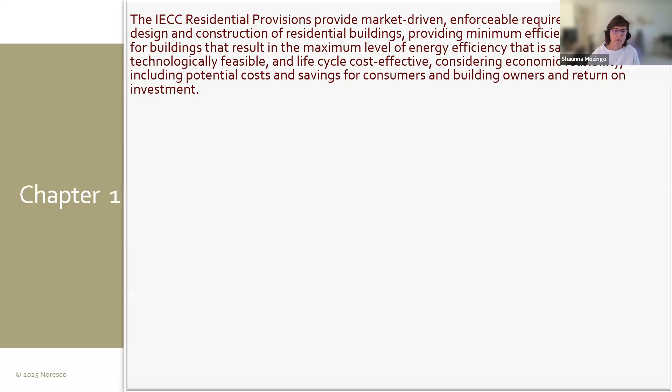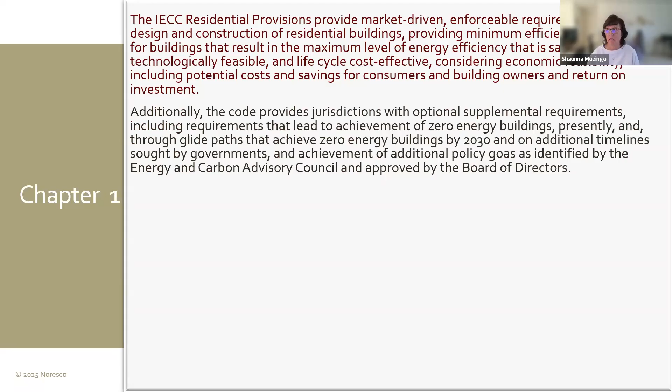Additionally, the code provides jurisdictions with optional appendix chapters, optional supplemental requirements to achieve zero energy buildings, all of those kinds of things. You still have the option of doing it, but it is an option. You can adopt the appendix chapters or utilize the supplemental resources that we'll talk about. Also, again, reiterating, there's some appendix chapters in there that are not mandatory unless the jurisdiction adopts them, but that can take it above minimum to deal with carbon emissions and those types of things that jurisdictions are looking for.

It's not limited. There has to be a prescriptive and a performance path, right? And I like this. I don't know if they lived up to it, but the code will aim to simplify code requirements to facilitate the code's use and compliance rate. I don't know if we managed simplifying it in some of those areas, especially commercial, but it's nice that it's in the intent. It's updated every 3 years with a subsequent edition providing increased savings. So that's letting everybody know that there is this intent that each additional cycle will build on it. It will never go backwards. So that's good to know.

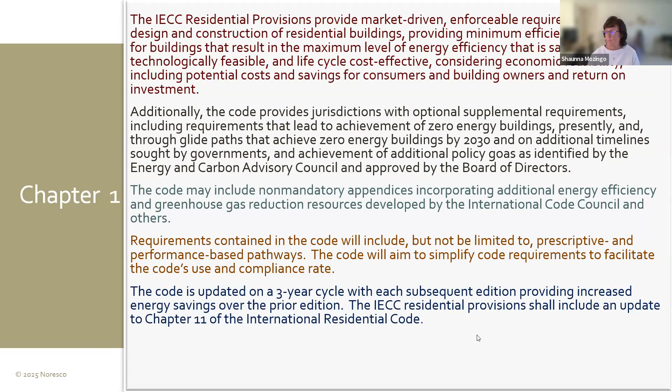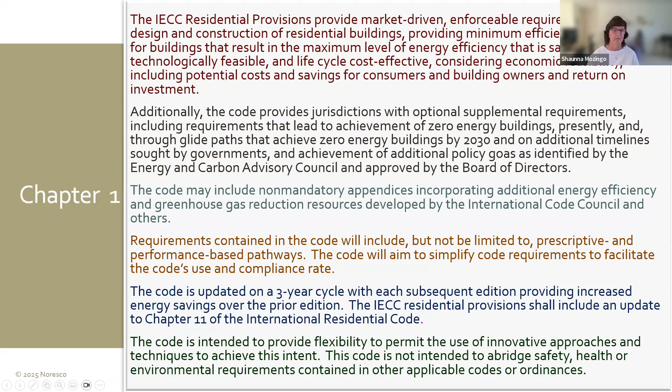And that the IRC Energy Code chapter comes straight from the IECC residential provisions. And then keeping the same sentence in there about provide flexibility, don't abridge safety, health, and environment. So we went from that one little tiny paragraph to all of this in hopes of covering everything that we could possibly throw at this code. So that's interesting. So a couple of things.

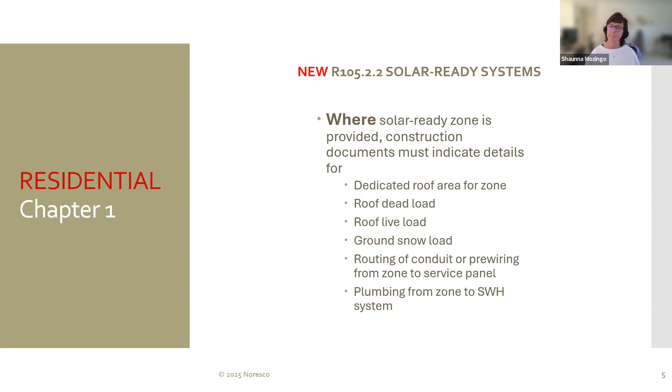There are some places in the code that do mention like solar or maybe demand response controls or things like that. But it just lets you know that where you install them, or where you do this, it has to meet the requirements. It does not require that you do it unless your jurisdiction requires it. So I just want to clarify that, when it says there's solar ready systems in 105, it doesn't mean you have to do solar ready systems. Where you provide solar ready systems, here's the requirements for that. This is for what you have to put on the construction documents to show those solar ready systems. So just want to reiterate that. I get a lot of questions like, it's in the code that you have to do solar ready. Only if your jurisdiction requires it.

All right, some new stuff that went into the code: definitions, of course. I always tell people when you get a new edition of the code, if you want to know where it's going, what's ahead of you in those multiple pages, it's getting bigger and bigger every time. It'll be as big as the IRC pretty soon. If you want to know where it's going, turn straight to chapter 2, right? You see all the new definitions, and some of the revised ones. But when you see new definitions, you can kind of see, okay, here's what's coming at me. Always go there.

Also, always reiterate to everybody that you cannot use this energy code or enforce this energy code or design to this energy code without looking in chapter 2 all the time. If you don't know the definition of conditioned space, for instance, there's no way you're going to enforce this code correctly, because it's not what you think. It's not just about heating or cooling a space, right? There's a lot more involved in it. It's whether or not your ducts are insulated, or whether or not your wall between two spaces is insulated.

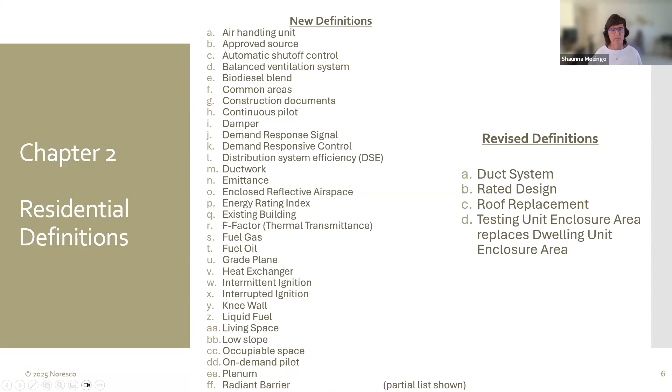There's a lot that goes into conditioned space, and whether you have to comply with the code. So make sure you're really looking at those definitions as you're going through this code. Some new things that got added. This is a new thing. It's been in commercial for a couple code cycles now, but it just got added to residential.

This idea that air actually has some good thermal properties to it, as long as it's not moving and it's not exchanging air with another space, right? So if I have a vented airspace, if I have air moving in and out of my cavities, that's not great. I can change temperature, I can change humidity, I can change all kinds of things wherever air moves. But if I can seal up this cavity really tight, and now my air is just moving within the cavity, that kind of movement is okay. I'm not moving in and out, so I have less chance of changing temperature and things.

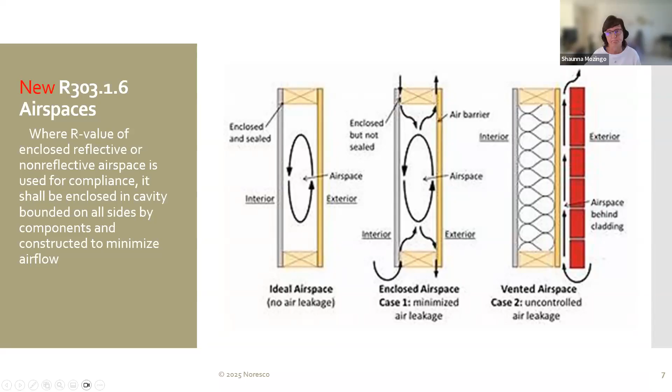If I build a really tight cavity and I don't have air moving in and out, I can use that airspace. I could use that air as part of my R value. There's a whole way of figuring out what that R value is and everything, but it's in there now. Like I say, it's been in the commercial for a couple cycles. I've never seen anybody propose it or use it, but it's in there, especially now that we're building tighter and tighter buildings and we're getting less air movement. Maybe it is good to use some of that air towards part of your R value. So just interesting things that make it into the code.

Another thing that made it into the 2024 are the radiant barriers. So radiant barrier folks have been at the code hearings as long as I've been going, wanting to get something in the code so that it was an even playing field for everybody that used them and everybody that makes them. It's never made it into the code, but now it has. There's no requirement for them whatsoever. It's just another one of those where if you use them,

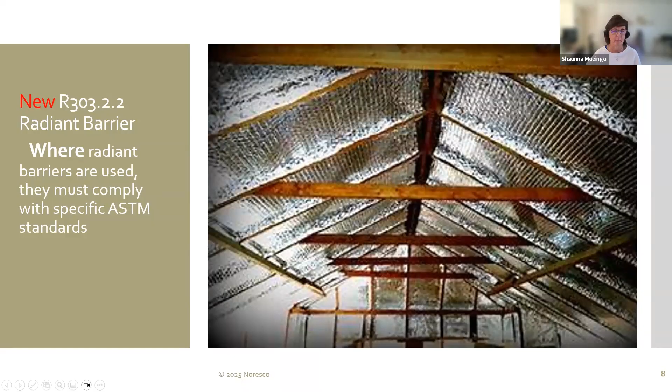they have to comply with a specific standard. So now all of the different radiant barrier manufacturers have to meet the same requirement. And so that's good. Then we get more consistency on at least the type of product that gets installed in the field. Not sure we'll ever get complete consistency on how things get installed in the field. But where you use a radiant barrier, they have to meet a certain ASTM standard. So that's good.

All right, let's talk about paths of compliance. They really haven't changed in a few code cycles. I think since the 2018, they haven't changed. Maybe the name has changed, but the concept hasn't, right? So we still have our prescriptive R value or U factor method. That's prescriptive by the book. You get what you get and you don't throw a fit, right? So you have a prescriptive table, you do what it says. Some people like that. They just want to be told what they have to do and they do it. And so if you go prescriptive, that's basically putting on plans everything that is shown in those tables and in the code sections, making sure that everything's on the plans.

We have another prescriptive-ish one, they call it prescriptive, but it does allow trades: the component performance alternative. Most of you are familiar with that. It used to be the total UA. That's REScheck, or if you use the rater software like Ekotrope or REM/Rate, it's the UA compliance. It's still called that in the software, but in the code, it's called component performance alternative. Not quite performance because it's only looking at the performance of the thermal envelope. It's not looking at mechanical and lighting and everything else. So it's not full building performance. It's just a component, the thermal envelope assembly performance.

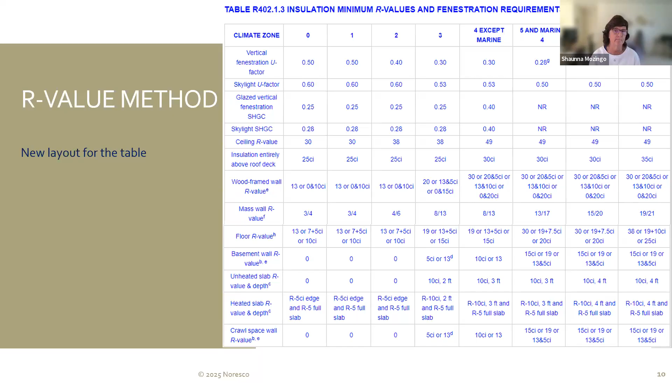But all of these changes got made. So it might be a little bit of a rollback in this table, but it's not a rollback in the code as a whole. There's still 7 to 8% energy savings that were gained overall for the building because of other changes. So just because it looks like we went back doesn't mean as a whole building that we did. So just some clarification.

U factor, same here. Don't forget this table has changed a little bit in how it's laid out. Not a lot of changes. I do want to make sure when you're looking at vertical fenestration, if you're in those climate zones that are getting to a higher altitude, climate zone 5, 6, 7, and 8, there are footnotes in there. This footnote D tells you that the code requirement is 0.28. But as soon as you get over 4,000 feet in elevation, then the footnote tells you it's 0.30 instead of 0.28.

So all of your software programs like ResCheck or your performance software are going to hold you to the 0.30 and compare you to the 0.30 as they're making trades because of this footnote. It's just because the argon gas that we sometimes use to get those lower U factors, you lose some of it once you get over elevation, and it doesn't hold it as well. So realize that they've changed that, and just be sure you're looking at those.

This U factor table, I've never seen anybody go total U factor for the house. Usually if they're going to do that, they're going to go with ResCheck, the component performance alternative with ResCheck. One thing that I do want to bring in is don't forget that now F factors got brought in. So you're going to see U factors for a lot of things in here, but then once we get to the slab, F factor.

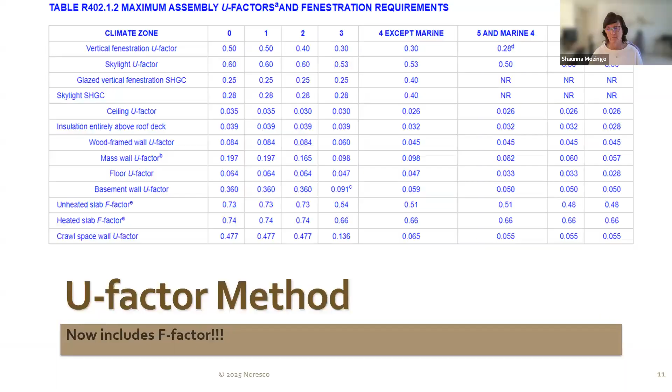All right, let's talk about component performance alternative. That's that ResCheck, or what used to be total UA. It's using that exact same U factor, F factor table in the code, it's just behind the scenes. And so it's that free software that you can go on the website and just put in your different components of the house. What are you using?

16 inches on center or 24 inches on center? Are you using 2x4s? Are you using 2x6? Are you using scissor trusses or raised heel trusses? You just tell it how you're building the house, and then throw in whatever insulation you're putting in, and it's behind the scenes calculating the U factor and letting you know if the whole building as a whole meets the total U factor for what you're trying to do.

So like I said, I've never seen anybody calculate it manually, but you could. So if you were using this path of compliance, you would either have to turn in a ResCheck, or turn in the calculations that show how you came up with the U factor for the whole assembly, right? Assembly U factor means the frame, the insulation, the drywall, the air film, every piece of an assembly gets looked at to get the U factor, and the total square footage of that. And so most people don't want to calculate that individually; they'll go into the software and do it.

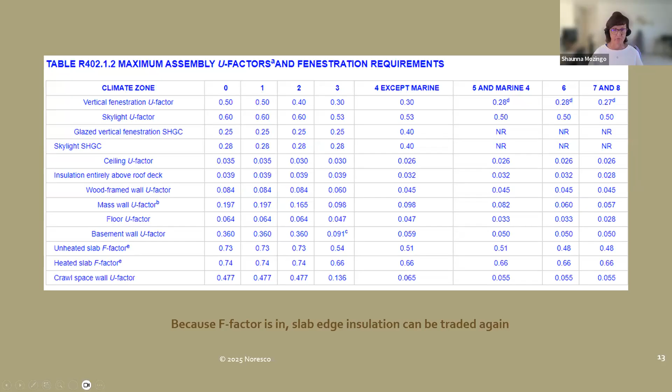Total building performance is R405. This is looking at more than the thermal envelope. This is looking at the thermal envelope and how it performs, but it also brings in what's your air movement, what's your air leakage, what's your duct leakage, how much lighting do you have, where are you putting your ducts, right? It's looking at all of the building as a whole, the total building and how it will perform, not just the envelope.

And so there's a little bit more trade built here. Because you can say, oh, I'm doing better than 4 ACH or 5 ACH or whatever it is for where you're at. And so now I can use that where I'm doing better to get out of something somewhere else, or to do less somewhere else. It's not very likely you'd totally get out of something, but you could use it to trade down. And so it just looks at a little more.

Something I want to point out in the 2024, if you're using it, and a lot of people don't know this, because remember I mentioned that electrification and EV and all of those things went into the code when it first got written. And then at the very end, the ICC Board of Directors pulled it out and put it in appendix chapters. So this is the only path in the whole code that has a penalty for using gas, when all of the gas versus electric went away and went into the appendix chapters. They just forgot it here.

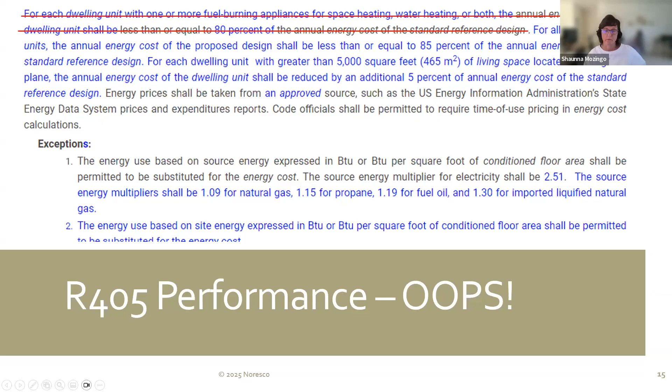It was something the board of directors took out and they forgot to take that one section. So it's going to have to be amended at the local level. So easy amendment, just put a strike through those lines, right? So that now it just says all dwelling units have to be 15% better. So just a heads up, there shouldn't be a penalty for gas in one path of compliance and not all the others.

If you're going R406, this is the energy rating index. This is the way, when I just look at the future, this is the way I see it. People want to get to net zero. How do you figure out what net zero is? It's just so easy with this scoring method, right? And so I see a lot more jurisdictions that are going above code or trying to set net zero policies are getting to requiring R406, which is this energy rating index.

And so you have a score of 100 is a 2006 house. We're trying to get down here to zero net energy. Not saying you're not going to use energy, but you're offsetting as much as you're using. And so it ends up being a net zero. So there's this scoring program. The backstops in it have changed over the code cycles from year to year.

One minute it's, oh, your envelope can't be worse than the 09 code. Oh, your envelope can't be worse than the 18 code. Oh, your envelope can't be worse than 10% of the current code. It changes every year. Why do they have a backstop in there? Because there's so much stuff you can trade in this path that you can't trade in others. I could put in a high efficient furnace and get out of some other requirements, where, well, a furnace doesn't last the life of a building.

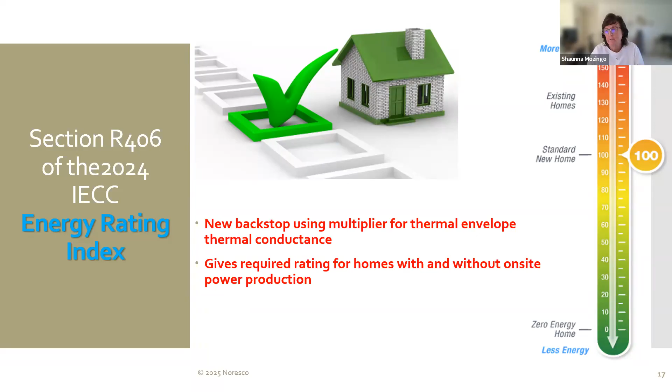And so you have to get a certain score if you don't have on-site power production, right? If I don't have some renewables on there, I don't have some on-site power production, then here's my score. If I'm using on-site power production, then here's my score. What this is trying to say is you can't just throw a bunch of solar on there and take it all the way to zero. You only get a certain amount of credit for the solar. You can put however much you want, I guess, but you don't get credit for all of it, because it still wants to make sure you're building a really good house in case the solar goes away.

So that's the new table. You know, if you were required to have a 54 without solar or a 43 with on-site power production, which doesn't have to be solar. When I've talked to some friends that are sitting on the 2027 residential energy code, they have said that there's very little change in the thermal envelope requirements, that more and more stuff will start focusing on the other aspects of the building, because they've gotten the envelope practically to where they can take it. So that was interesting to hear that they're not going after a bunch more on the thermal envelope. All right.

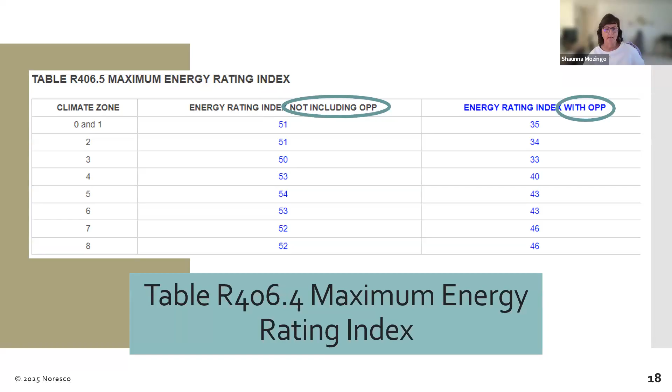If you were on the 2021, you saw this R408.2, this additional efficiency package. This came into commercial in 2012. Some people say the name is kind of misleading. Some people say, oh, you want me to get more energy efficiency out of the building, you want me to go above code. And that wasn't the idea. The idea was keeping with flexibility, to say, hey, we need X amount of increase in efficiency out of the buildings, but we can only crank it down so much before we take away the flexibility. So we're going to crank it down a little over here prescriptively, and then you tell us how you want to get the other 15% or 8% or 10%, whatever it is. And maybe it's 5%, right? In the 2021, it was 5%.

So you either put in a better envelope or better cooling equipment or better water heating, you pick how you want to do that, but you have to pick one of those. If you go prescriptive, you have to pick one. If you go performance, you either pick one or do better on your energy costs. If you go ERI, you just have to have a 5% better score. Well, that all went away. I mean, it's still there, but it's just different. What we've learned over the years is why should I get more credit for a high efficient furnace in Florida, or a high efficient air conditioner in Aspen, right? Not every climate is the same. They shouldn't get the same credits or be able to use them the same.

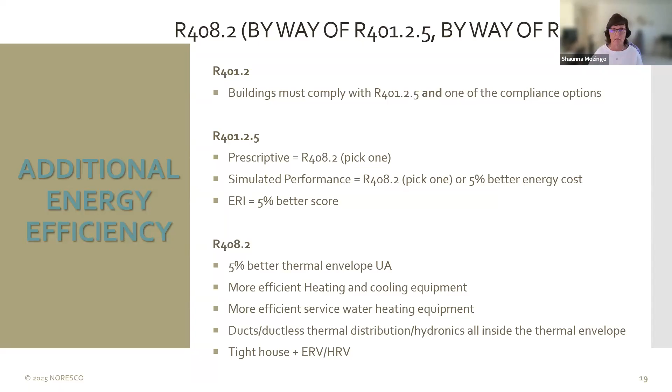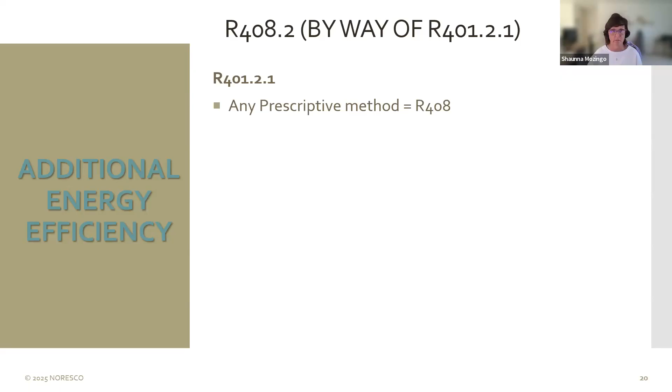So they changed it to be this point system, right? So R408 now only applies if you go prescriptive, which also means total component performance alternative, REScheck. It just doesn't apply to R405 or R406. So if you go with a prescriptive method, U-factor method, R-value method, or component performance alternative, you have to do the additional efficiency package. So that's the first change. And then it just says you have to get some credits. If you're building a new house, you have to get 10 credits from at least 2 measures, right? And so it's looking at a table.

And for the first time, house size plays a role, right? You're going to start seeing this more and more in all the codes coming out, wanting you to build smaller houses. If you go over 5,000 square feet, now you have to get more credits. You have to go a little bit above and beyond in your efficiency measures. So this is how it's laid out.

Also, each measure has to comply with its code section. So there's a table, you find the points, and then once you figure out your points, you have to go to the code section and do exactly what it's talking about in the code section. So every measure in the table has its own code section with more clarification.

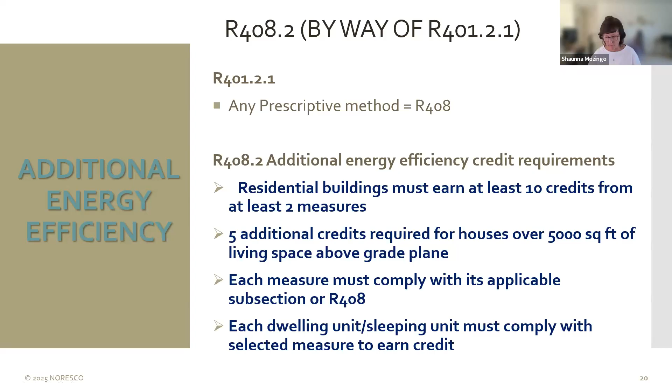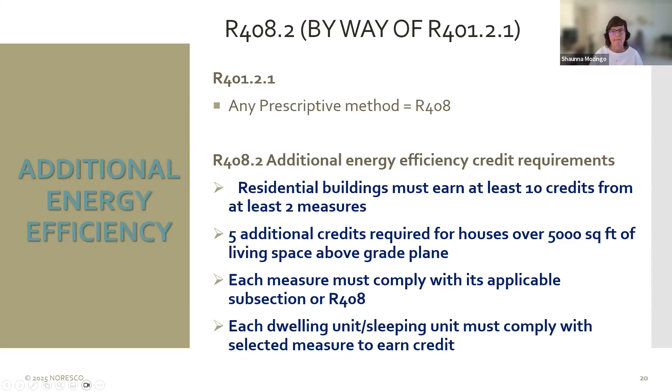And then each dwelling unit or sleeping unit, so if you have like an R2 or a townhouse or whatever, attached housing, each dwelling unit or sleeping unit has to comply with the measures to earn the credit, not the whole building, right? So all right, what do the tables look like? It's kind of like commercial. Here's the code sections for each measure, here's the measure, and here's the climate zone. So not everybody's going to get the same kind of thing.

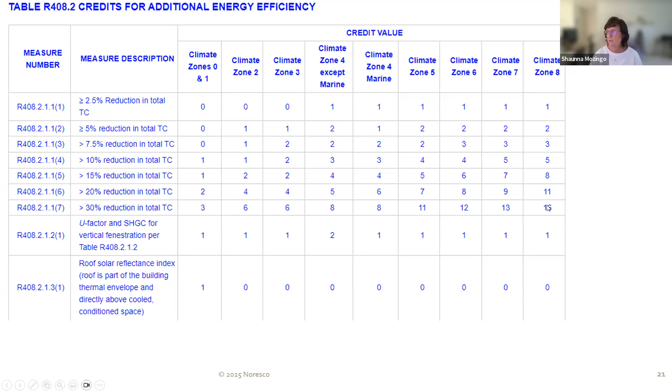I'm not going to get points for a reflective roof in cold climates. I'm going to get credit maybe for it in climate zone 0 or climate zone 1. I might get some credit for that, right? I'm going to get a lot more credit for reducing my thermal envelope thermal conductance in really cold climates than I am in really hot climates, right?

However, don't forget it said you have to get it in 2 measures. So even if you got 21 or 18 points, you still have to do another measure because you have to do at least 2 measures. So don't forget that. So all kinds of, this is just only partial of the table, all kinds of them showing you what to do.

All right, a couple of little things just real quick: slab on grade insulation. Almost every climate now is going to require slab edge insulation. It's just talking about we're trying to protect the edge of the slab where the heat loss is. This boilerplate, what I see come in all the time for these houses. And so it's just saying, hey, you have to start at the top of the slab and go down. None of that has changed.

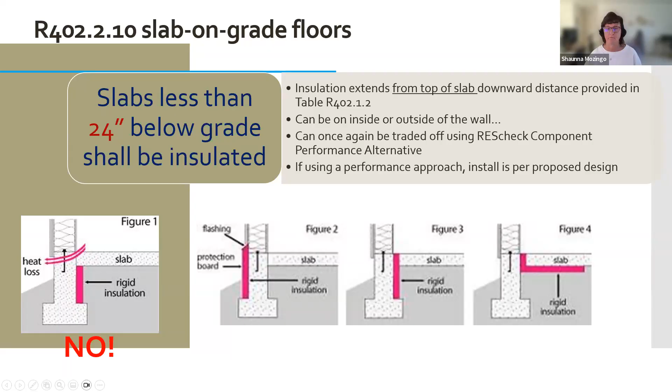What changed is it only used to apply to slabs less than 12 inches. Now it's slabs less than 24 inches. Once you get more than 24 inches below grade, the ground is providing enough insulation. So, but again, it can be traded off. So don't freak out about that.

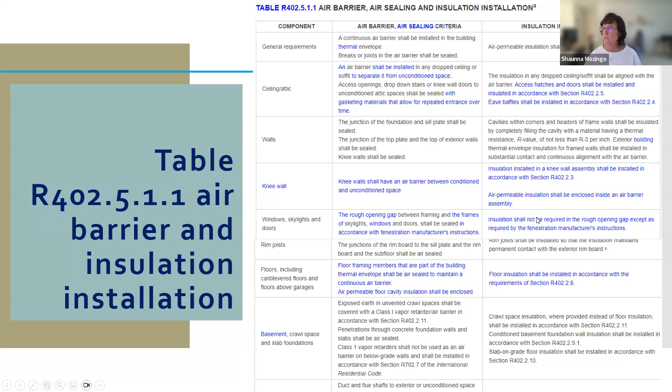The new air barrier and insulation table, I mean, it's not new. It's been in there since 09. It got cleaned up to make it a little bit more user friendly. No real huge technical changes in it other than adding a place on air sealing at common walls.

Some friends of mine, Robbie Schwartz and some other friends that have worked in the industry for a long time, got together with UL and with the fire guys and tried to figure out how do we get air sealing in common walls without voiding the listing of those rated wall assemblies. They finally worked together to come up with this.

And so basically what it's saying is that you have to have an interior air barrier. You need to have air sealing at these common walls. So you could do that two ways. Either install a fire resistance rated assembly that shows what they allow for air sealing. Some of them have been tested with these air sealing, whether they allow foam or whatever they allow.

Some of them have been tested that way, but most have not, and they don't want to go back through the testing because it's tens of thousands of dollars. So they have agreed to write up a sheet that says what they agree to. So you either go in accordance with their approved rated assembly or be supported by approved data. So they've come up with data sheets saying, here's what you can do.

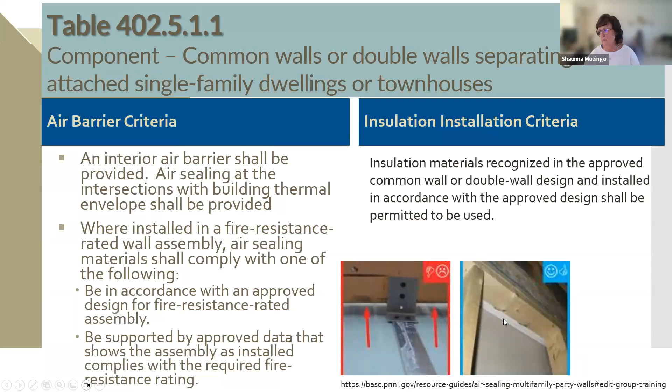And so if somebody says they're going to use this UL wall, you go to UL: do you have a data sheet that shows me the air sealing that's allowed to be used? And so that's just a new section that got brought in to allow more air sealing at those walls.

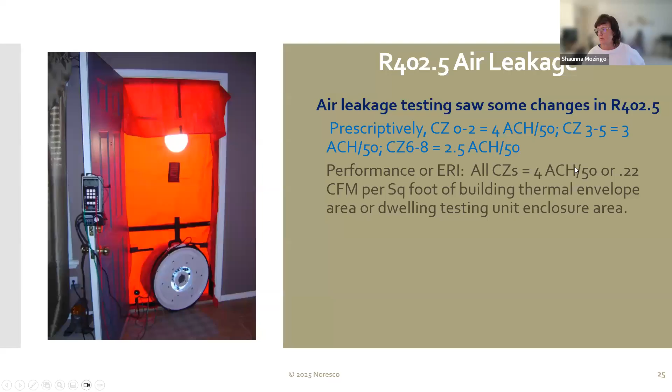Blower door testing has changed a little bit. It saw a few changes. The main one is if you're in climate zone 6 through 8, it went from 3 air changes an hour to 2.5 air changes per hour in those colder climates. And so that's one of the big changes. It also is allowing you to trade it off. If you go performance or ERI, you can go to 4 ACH as long as you're making it up somewhere else and you can still pass, right? You can trade that.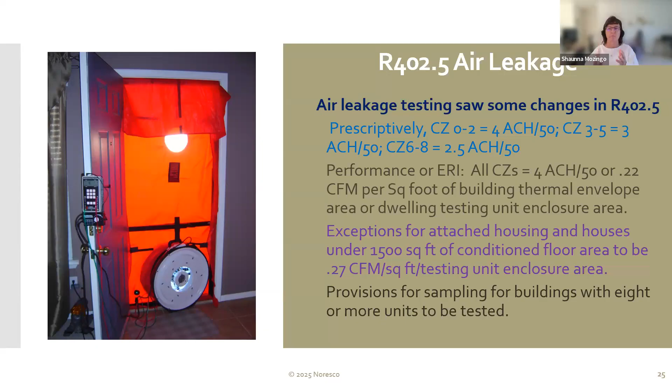And it did bring in some exceptions. It's really hard to get a 3 ACH50 in a really small house. The bigger the building, the more volume of air, the easier it is to pass. And so they brought in an exception for smaller houses to use a CFM per square foot instead of an ACH50. And sampling got brought into the code. So if you're doing multiple attached housing units, you can sample instead of doing every single unit. There's a sampling protocol that got brought in. So that's nice.

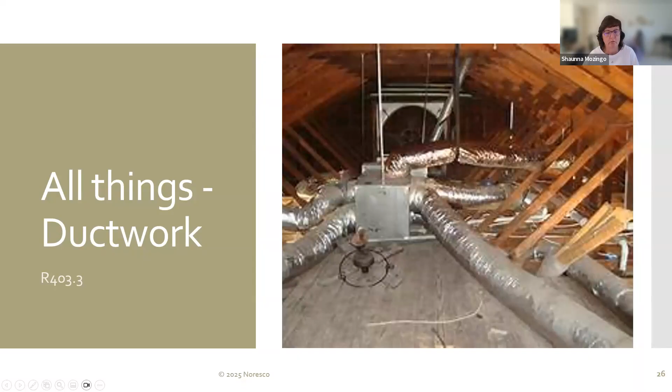Ductwork has changed. Especially if you go performance or ERI, you could get a really good credit for having your ducts all inside conditioned space. But what if I put them all in the unconditioned attic? Is there any way to still get a good credit for them? Yeah, you can call your ducts inside the envelope, inside conditioned space, which is a big credit, a big deposit into your checking account, right, in some of those trade-off paths.

So they are considered inside the conditioned space if all the space conditioning equipment is located on the internal side of the air barrier and thermal envelope, and the duct systems are located within the conditioned side of the thermal envelope. So that's pretty simple. Put everything inside the envelope, it's inside conditioned space. Okay.

But you can also call them inside conditioned space as long as they're buried. You put your insulation in the attic and you bury the ducts in insulation, and it's very prescriptive. It tells you how much insulation has to be on the bottom, on top and all the way around it, plus the insulated duct. Your air handler is inside the thermal envelope, they don't leak very much per 100 square feet, and your ceiling R-value meets a certain requirement.

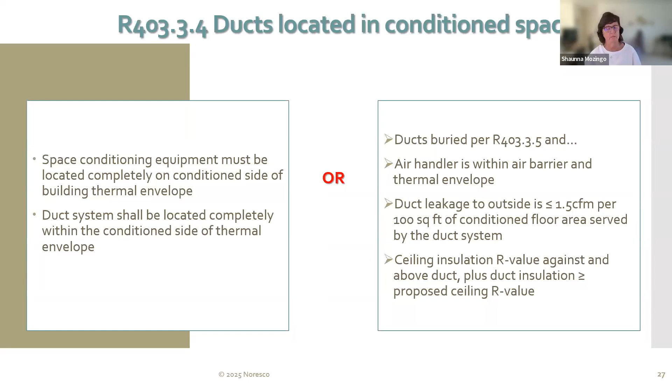There's a way to bury your duct in that ceiling cavity and still meet the buried duct inside the envelope and your ceiling R insulation requirements. The home builders work really hard to get some great stuff in the code. And if you do that, you can call your ducts inside conditioned space and get a really good credit for it.

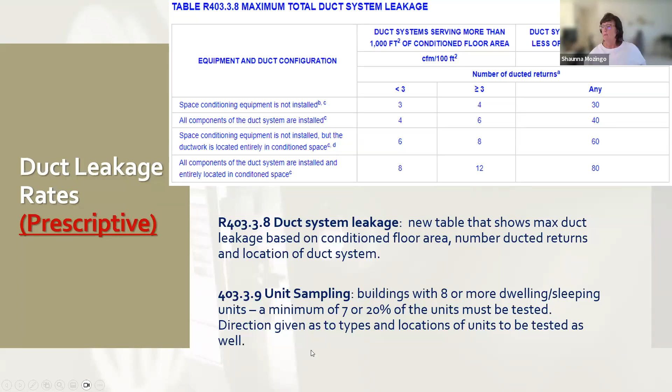Duct leakage changed, right? It used to be you leak 4 CFM. Now it's dependent on the size of the house, over 1,000 square feet or not, how many ducted returns you have, and whether your equipment and ducts are in conditioned space. If you're over 1,000 square feet, here's how many CFM per 100 square feet you can leak. If you're under 1,000 square feet, you can leak this many CFM, not per 100 square feet, just CFM. So it's changed quite a bit and brought in sampling for duct testing as well.

Now 100% of the lights have to be high efficacy, except for those lights inside your stove or refrigerator. But all luminaires in a habitable space have to have a dimmer or an auto shut-off control that turns the lights off within 20 minutes. So again, you have to look at your definitions to see the definition of habitable space. Any luminaires in garages, unfinished basements, laundry rooms, utility rooms, or the like have to have an occupancy sensor.

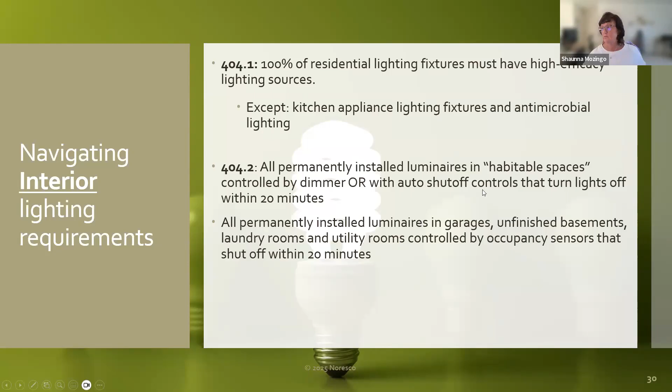So that's new. Controls came in 2021. It was really crazy to figure out what it really meant, so they reworded it in 24. But you do have lighting controls, and you also have exterior lighting controls. R2, R3, and R4 has exterior lighting power density requirements, meaning watts per square foot you can use outside.

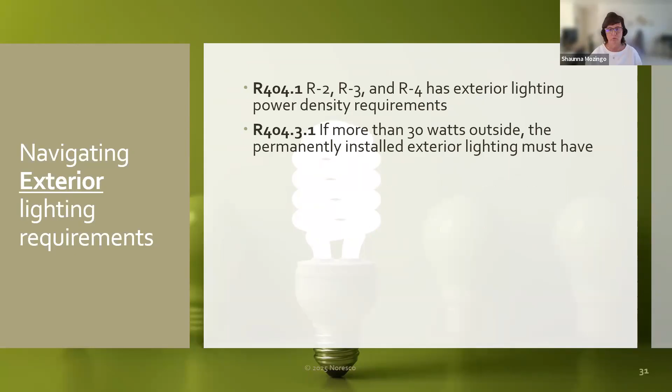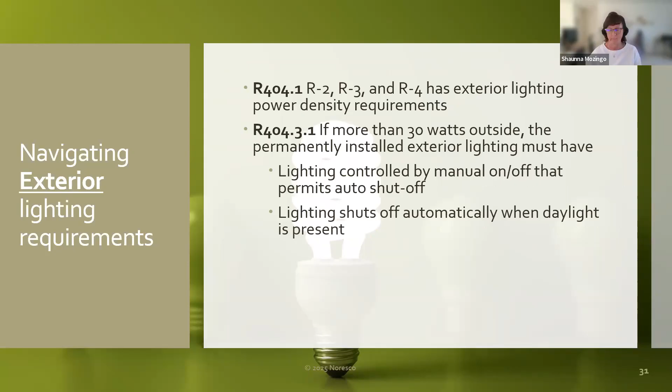But if you're more than 30 watts, you also have to have controls that manually shut them off or automatically shut them off. Whatever form you use, as soon as it's daylight, those lights have to shut off outside the building. And then of course there's always override controls that are allowed. So some new lighting requirements in 2024. Most of them came in 2021. They just kind of tweaked them to try to make it easier to understand.

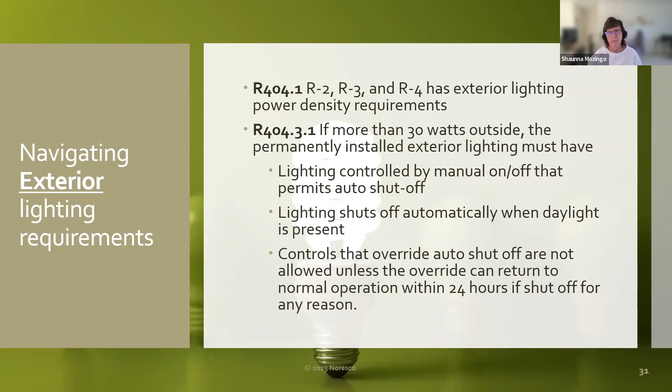When you look at renewables, again, there's this thing in there, renewable energy certificates. Because all of that electrification stuff came into the code, so did RECs. When they took all of that out, they left RECs, but only saying when you do renewable energy, you need to do RECs. Most jurisdictions are amending this out because they do not want to track the RECs from owner to owner, back to the original owner, because it's non-transferable. But it is in there. It's not that you have to do RECs, but when renewable energy is used, then you have to provide that documentation.

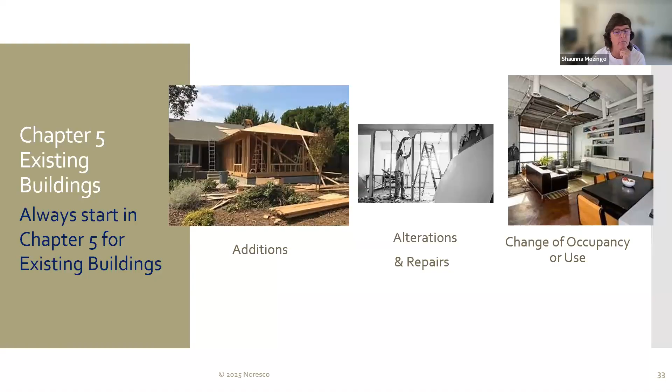Lastly, is chapter 5, existing buildings, right? The biggest change for existing buildings is those additional efficiency credits that never applied to existing buildings now do. So if I do an addition, it's always been in there. New construction has to comply. You're building an addition. It's new construction, so it has to comply with the code, right?

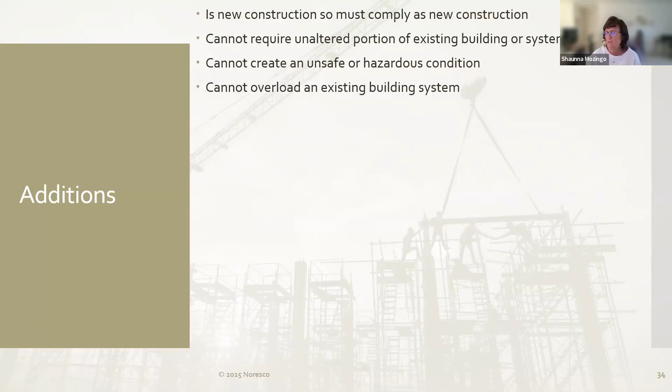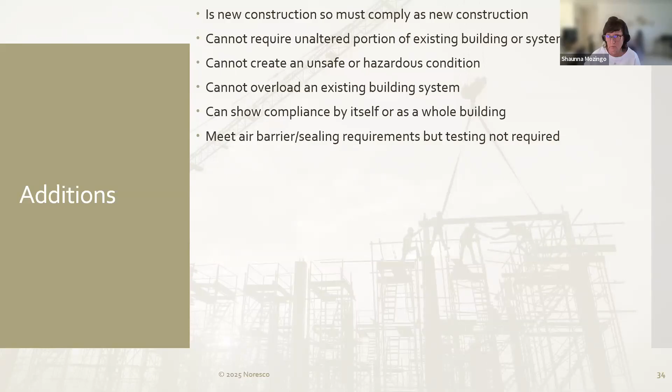It can't require unaltered portions to be brought up, can't create an unsafe condition. All of these have been in there forever. Can't overload an existing system. Can show compliance by itself or as a whole building. Well, now we start getting into some of this. You have to meet the air barrier and air sealing requirements, but you do not have to do blower doors in additions, right? New windows have to comply with the U-factor and solar heat gain coefficient. New mechanical and water heating has to comply as new construction.

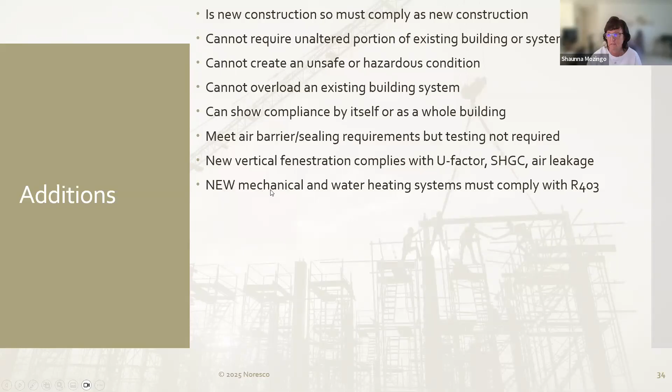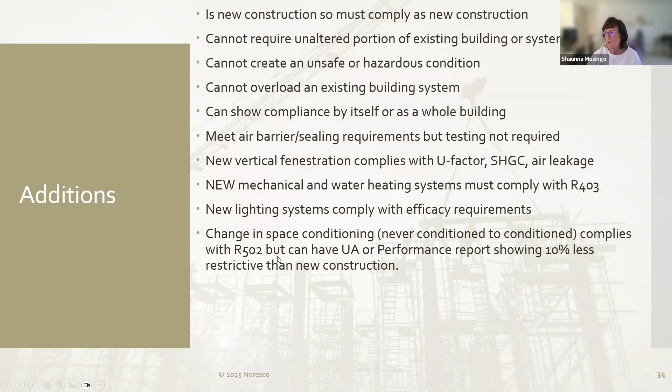If you use an existing system that you're pulling over from the rest of the house to do this addition, then that's not. You can't overload an existing system, so you have to make sure that it can handle it. But unless it's new, it doesn't have to meet the mechanical requirements. New lighting systems have to meet the requirements. If you change from unconditioned to conditioned, then you have to comply with the code with R502 for additions. But you could go UA or performance, and you could be 10% less than code, right?

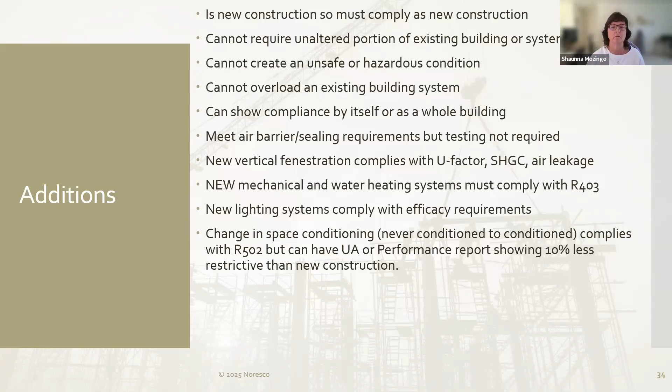Say I have an existing building, and I'm attaching an addition onto it. There's going to be some issues there. What is the U-factor of this wall I'm attaching it to? There's just things that happen. So it's going to allow you a little bit of leniency there, that you don't have to be 100%. This is the big one. Additions have to get at least 5 credits from that table. There are some exceptions in there, so definitely become familiar with it. But we never had to get additional efficiency credits on existing buildings before. Now you do for both residential and commercial. So pay attention to that.

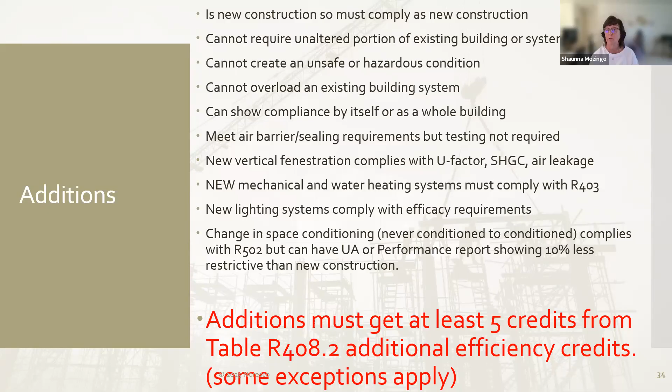If you're an alteration, again, not much has changed. You have to have a continuous air barrier; if you take drywall off, you've got to make sure there's an air barrier in there. A lot of times your drywall is your air barrier, but you have to have drywall or an air barrier. It's not going to make you do a continuous air barrier for the whole building, just each part that you touch.

You can't make things worse than they were. So, you have to comply with the insulation. You might be trading things off, and that's fine. But if you had R13 in there before, R13 as a minimum has to go back in. You can't take it to a lower value, even with your trades.

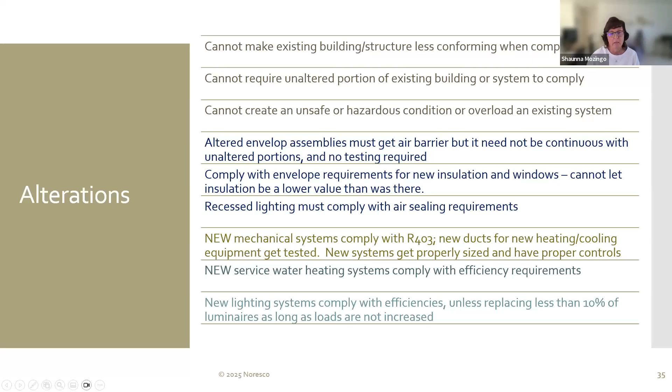Recessed lighting has to be air sealed. New mechanical, new water heating, all of new has to comply. New has to comply. And then you have to get 3 points from the additional efficiency tables, which you never had to do before. So just pay attention to that. That's a big change, I think, for folks.

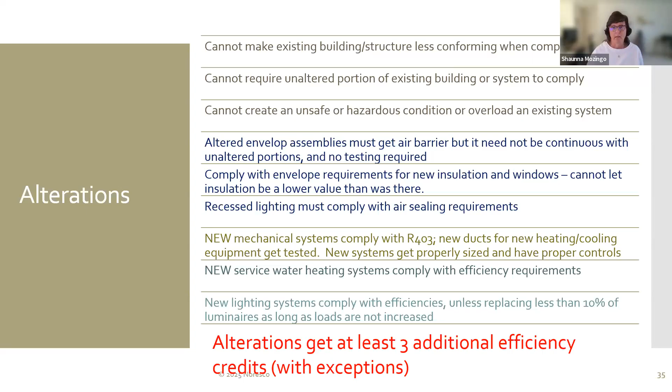This was all in the body of the 2024 when it got written. It got pulled out. ICC was like, hey, this is good for those who want to go there, but this is an international code. Not everybody can do this as their minimum. And so they pulled it out and put it in the appendix.

There's some stuff for all electric buildings that they weren't even willing really to make an appendix for, so they made it as a resource. You can use it if you want to, it's there, but they're not even going to call it an appendix chapter. And so that's in there as well. All right, so that's your new 24 in a huge nutshell.

I just want to real quick, because this code said, hey, what's coming next? I just want to have a real quick conversation of what I see on the horizon, whether it was from the 21 or the 24 that got written and it got pulled out. But I see a lot of states now bringing it back in. And so I just want to talk to you about a couple things, whether it's your jurisdiction or your state is starting to bring electrification. What does that mean?

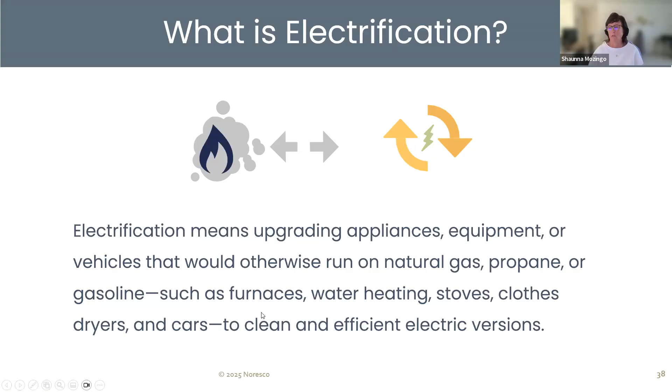So what is electrification? Most people are looking at trying to make electric ready, but there's so many different levels of that. You have electric ready, where I'm just going to pre-wire, I'm going to run the conduit. If I have a gas dryer, I'm going to run an outlet for an electric one in case the new homeowner wants to switch them out. It's not that simple. A gas dryer takes a 110 outlet and an electric takes a 220. So you're going to have to put in both.

Maybe it's going to make builders decide to go one way or the other, right? And I'm sure that that's the idea. But I'm going to save capacity on my stuff, but I don't have to actually put in electric appliances. I'm just making it ready. If I do that at new construction, it's cheaper than tearing up walls and floors and everything afterwards. That's the idea, right?

You have electric preferred, which some people are doing. It's just saying, I want you to go all electric, but I don't want to require you. So if you go gas, you're gonna have to do these extra things, kind of like that was in that performance path. If you go gas, you got to be 20% better, but if you go all electric, you only have to be 15% better, right? Some people are doing it that way. They're going to incentivize you by having less requirements if you go electric. That's called electric preferred.

Electric only for space and water heating. They're saying you can have a gas dryer, you can have a gas cook stove, but your water heating and your mechanical have to be electric. Some are doing that.

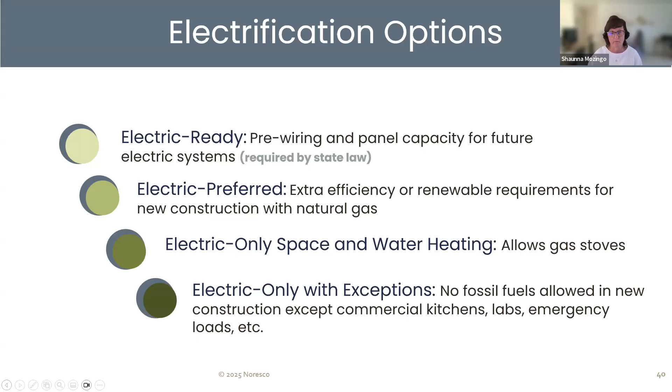Why we want it: most everybody is requiring it for new buildings, because it's harder to do for existing buildings. Trying to get it at new is the idea, right? That's where the money is saved, by doing it at time of construction.

Some questions that I see all the time: are utilities ready? Can the grid support the extra load? Well, one, we're building better houses, so we're not going to have as big of a load. And two, yeah, the utilities know, they've been involved in this for a long time. They know this is coming, so they're getting prepared.

And plus, it's not all happening at one time, it's a house at a time. It's not like every single house in the city is going to turn on at the same time. It's like, okay, this house was built today. There's still a lot of existing structure that isn't electric, right? So it's going to be sporadic and over time.

What if there's a power outage? Well, if there's a power outage, your gas stove isn't going to work either because it has an electric igniter, right? If there's a power outage, we're all going to be relying on something for backup. And so you have to think about those things.

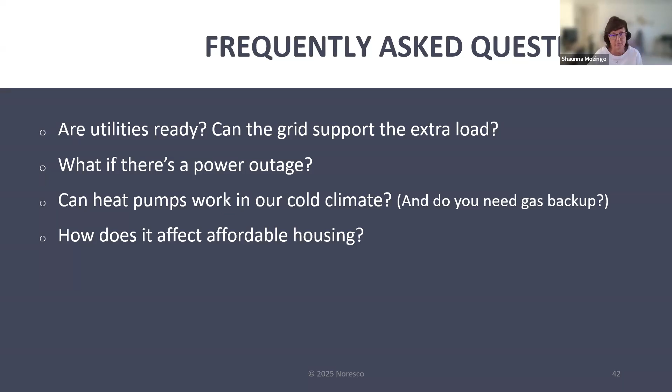Is there maybe some economic growth, because some of these technologies, heat pumps and different things, are going to require more specialized contractors? That can be a pro and a con, right? But thinking that maybe there could be some job growth by having new technologies, new knowledge.

Better environment indoor and out, right? Less carbon emissions, cleaner, it's at least cleaner. Highly efficient equipment, almost all of that. You take a heat pump, the efficiencies are through the roof. And so definitely a benefit.

This is a pro and a con, I think. Less expensive construction costs than a mixed fuel building. Why is it less expensive? It's less expensive on this side because I'm only putting in one utility. I'm not running gas and electric, I'm only running electric. Yes, it's more expensive to do both gas and electric. That's one side of it. So when we get to cons, we'll see the other upfront cost.

You can offset with renewables. You're going to have to, right? You're not going to want to have this big, huge electric bill; you're going to want to offset it with some renewables. And so that's nice that you can offset it with something, right?